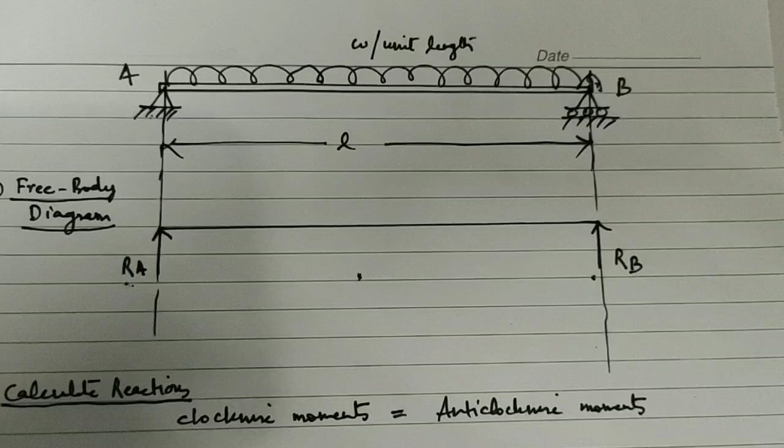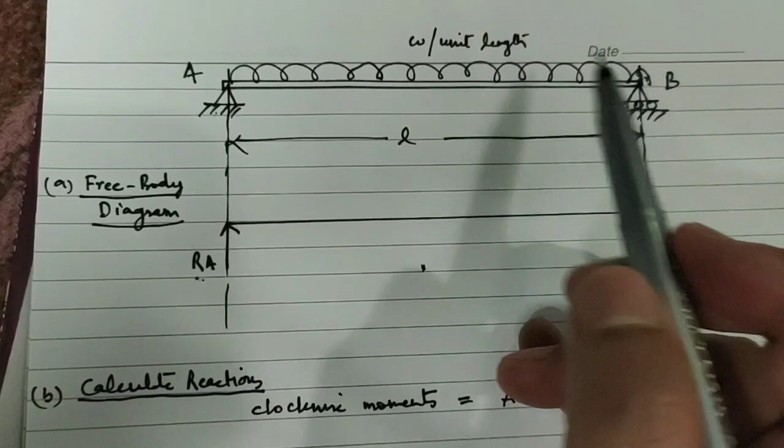Now we will find the shear force and bending moment diagram for a simply supported beam subject to a uniformly distributed load W per unit length. That is, this load is W per unit length.

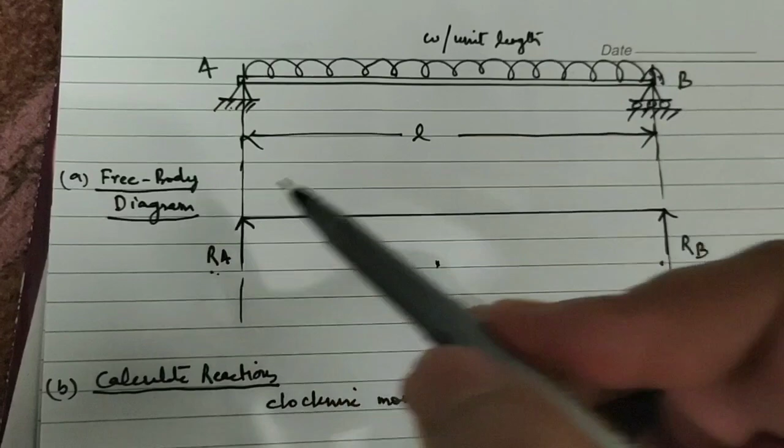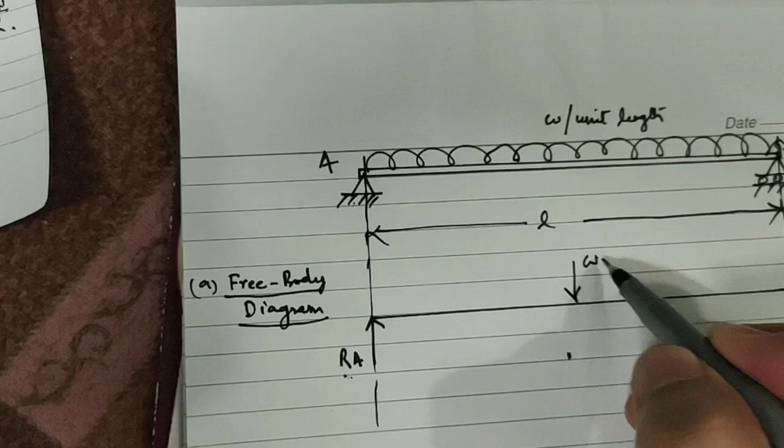First, let us draw the free body diagram. The hinge support is replaced by one reaction RA acting upward. The roller support is replaced by another reaction RB. The total load will be equal to W into L, and that will act at the center, at a distance of L by 2 from RA and L by 2 from RB.

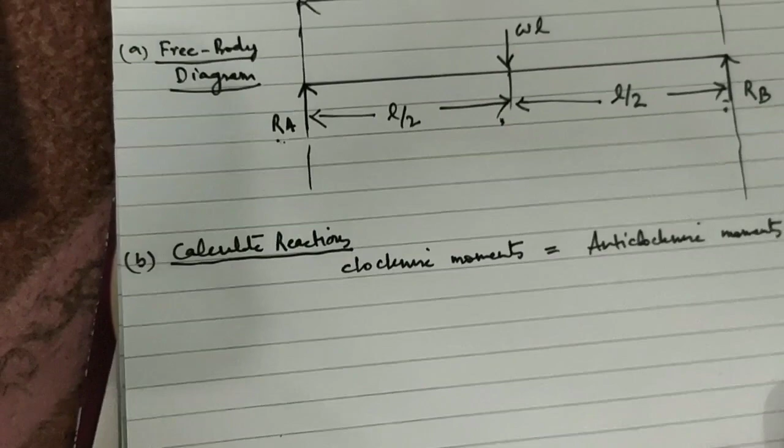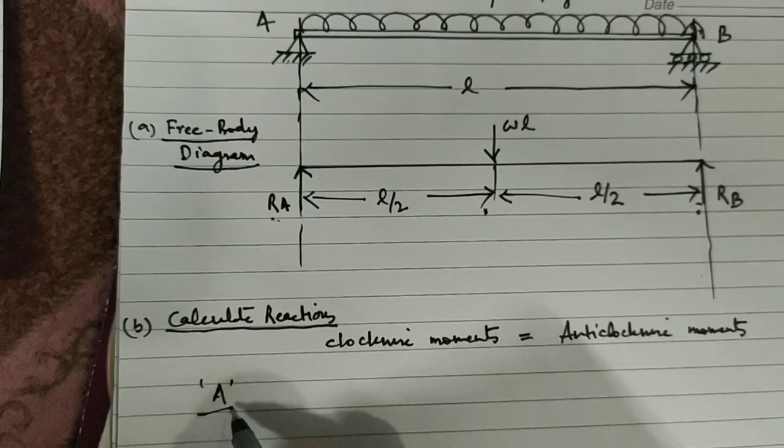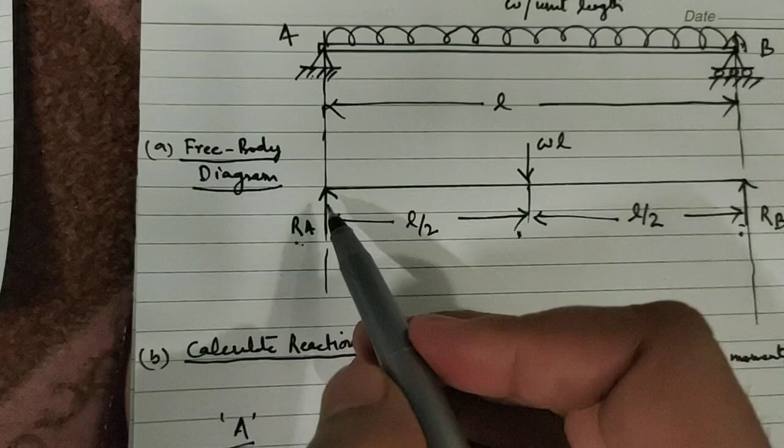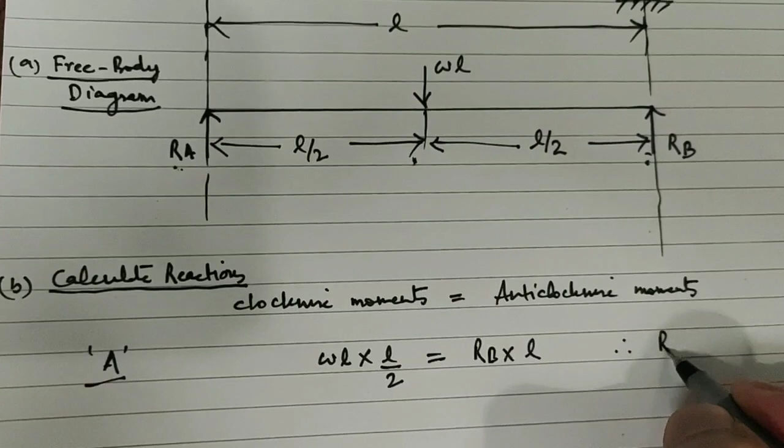Now we will calculate the reactions using the equilibrium conditions, that is clockwise moment equal to anti-clockwise moment, taking moments about point A. Clockwise moment will be WL into L by 2, and anti-clockwise moment about point A will be RB into L. So from here, RB comes out to be WL by 2.

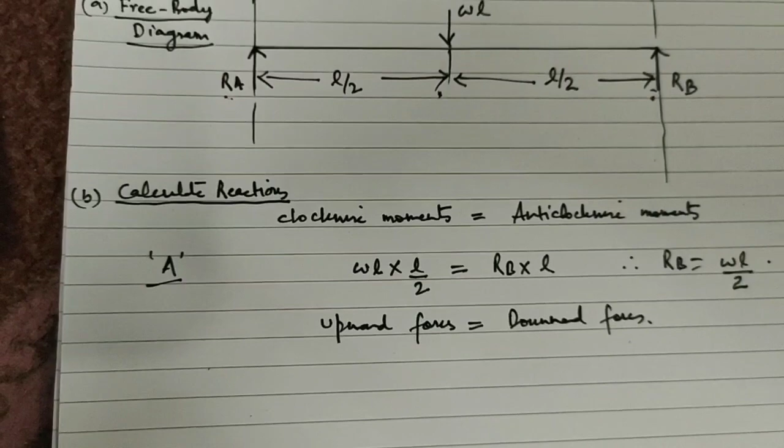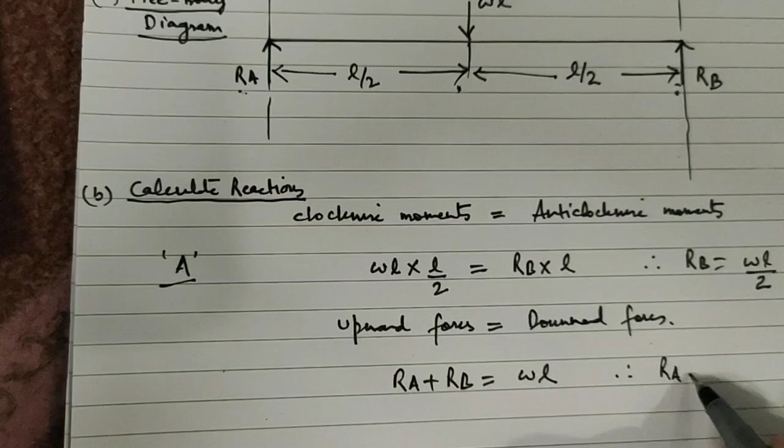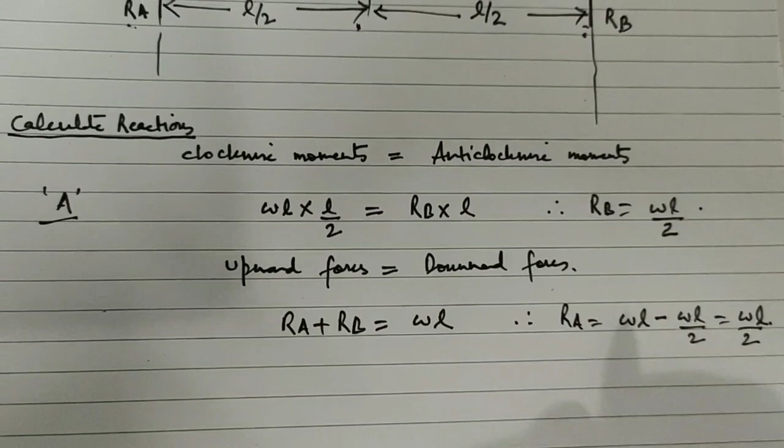The other equation is upward forces equal to downward forces. Upward forces are RA plus RB, equal to downward forces WL. Therefore RA will be equal to WL minus RB, that is WL by 2. So these are the two reactions at point A and B.

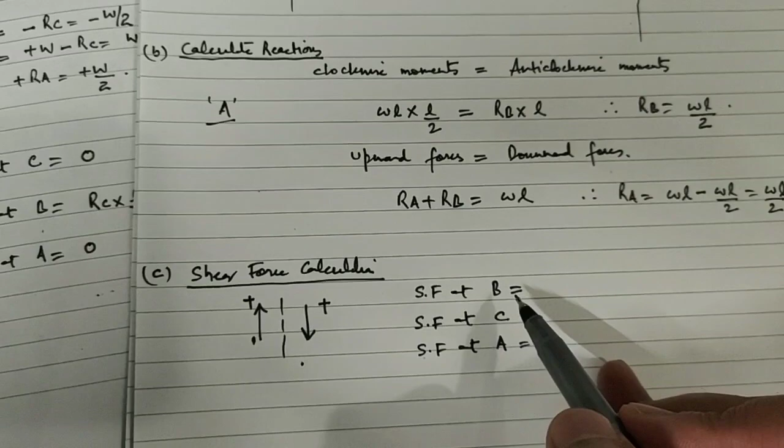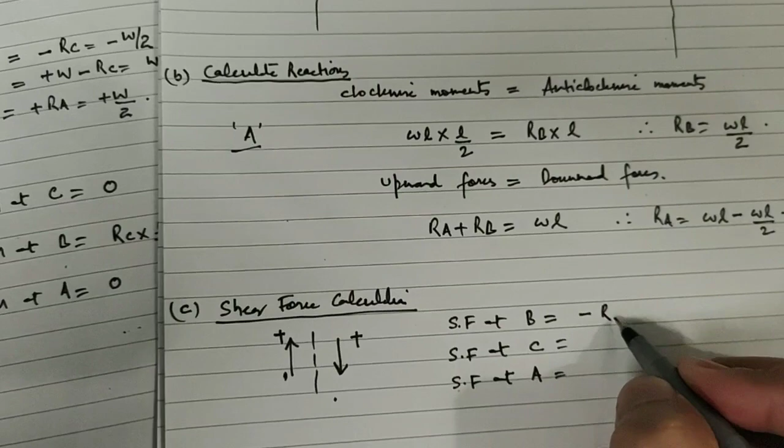Next we'll find the shear force at various points by considering the right hand side or left side of the beam, using these sign conventions. Now consider the right side of the beam. The shear force at point B will be upward RB, and upward force is taken as negative, so minus RB, that is minus WL by 2.

The shear force at point C, again considering the right hand side of the beam: downward force is positive, upward is negative. At point C there are two forces on the right side: RB acting upward, and only half of the UDL on the right side, which is W into L by 2. So the shear force at C will be half UDL, WL by 2, minus RB, which equals 0.

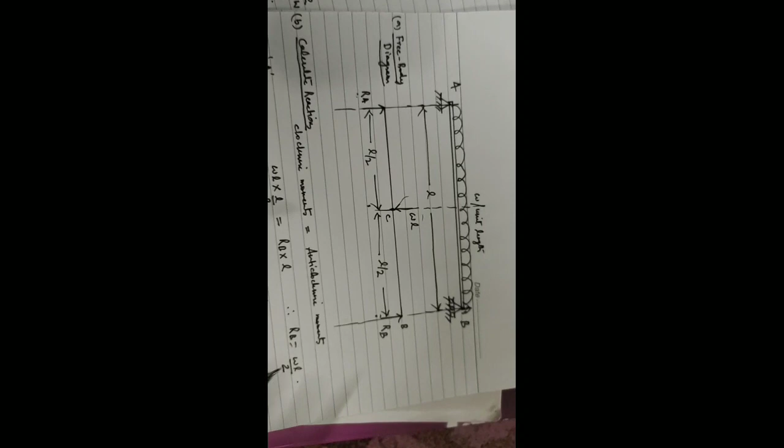Now for the shear force at point A, we consider the left hand side of the section, where upward force is positive. On the left side there is only one force, RA, upward. So the shear force at point A will be equal to WL by 2.

This diagram was only for calculating the reactions. In order to draw the shear force and bending moment diagram, we have to consider this other diagram.

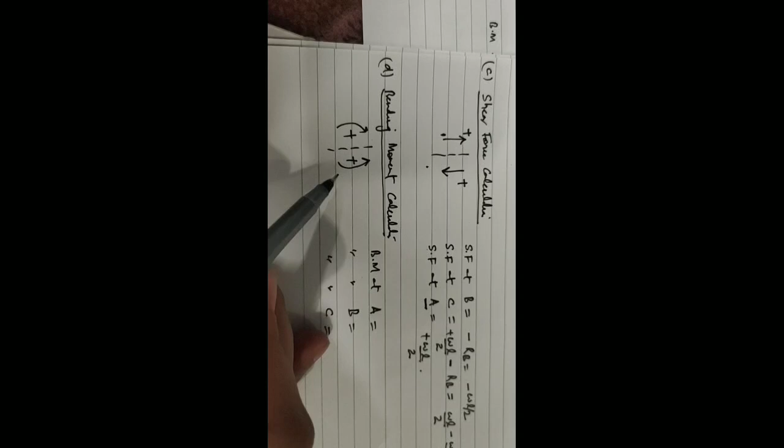Now we will calculate the bending moments using this sign convention: on the right side, anti-clockwise is positive, and on the left side, clockwise is positive.

Now, the bending moment about point A, considering the left hand side of the section: the moment of RA at A will be 0. Similarly, the bending moment at point B, considering the right hand side of the section: the moment of RB at B will be 0. So at the supports, the bending moment at A and B is always 0.

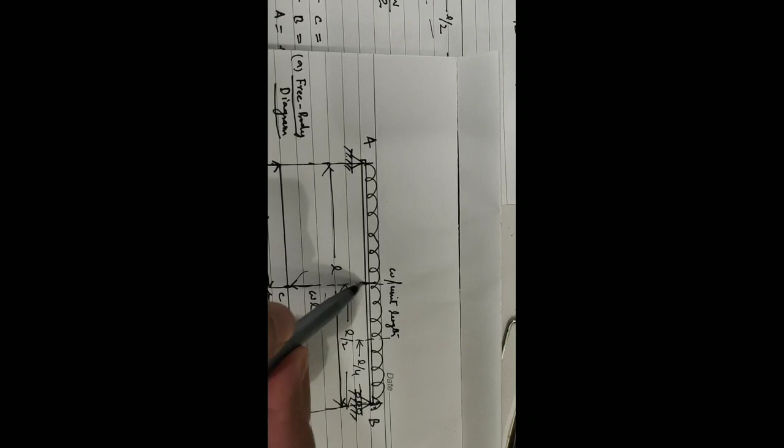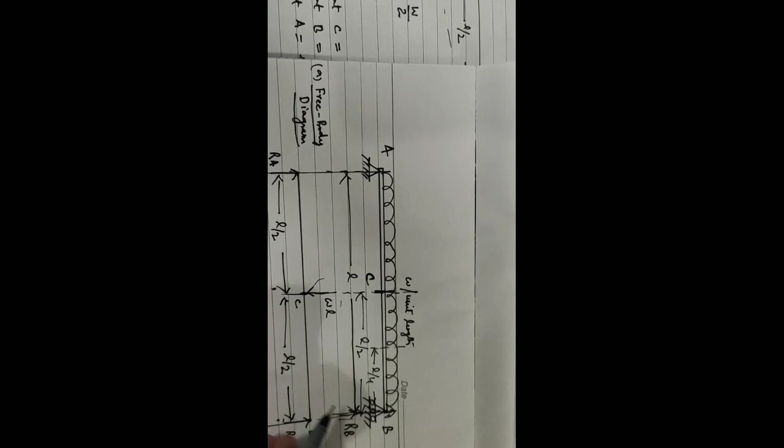Now we will find the bending moment about point C using this diagram. This is point C. The bending moment at C will be equal to reaction RB multiplied by L by 2, which acts in the anti-clockwise direction, and anti-clockwise moment is taken as positive. So this will be RB into L by 2, positive.

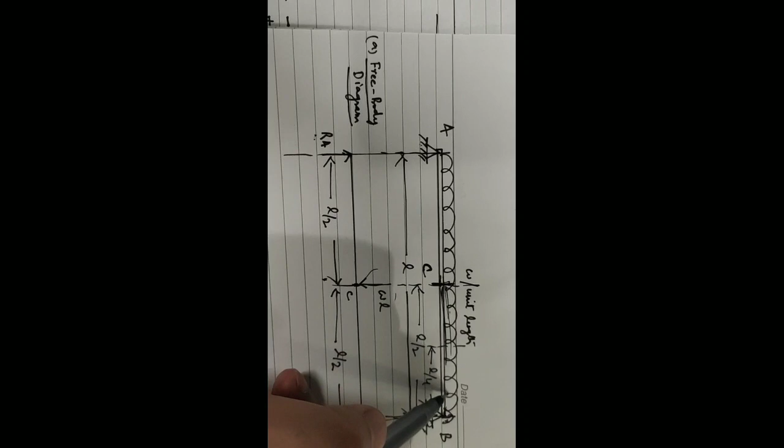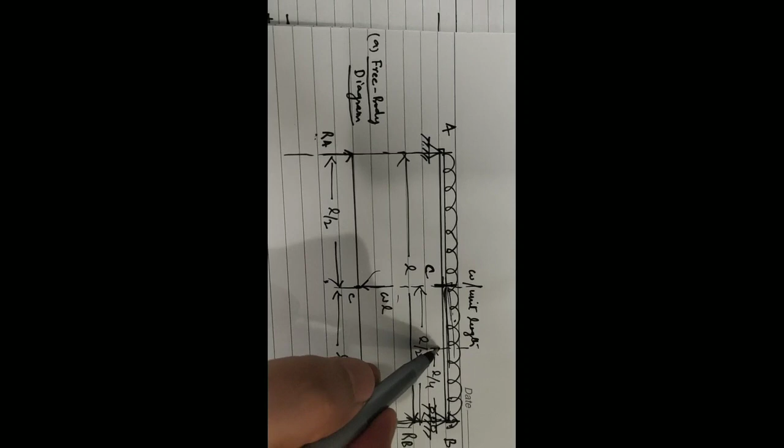At point C, there is also the half UDL. The half UDL force is W into L by 2, multiplied by the distance at which it acts. Since it acts at the center, the distance is L by 2 half, that is L by 4. So the moment is W into L by 2 into L by 4, and this force acts downward.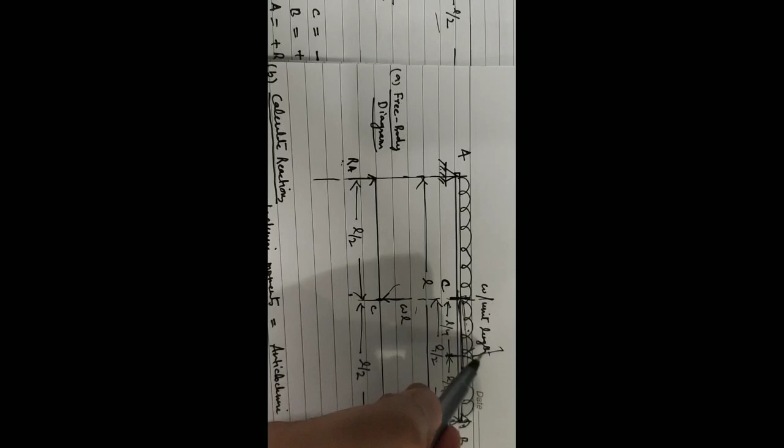So at point C, its moment is in the clockwise direction, therefore it is taken as negative. So this will be equal to RB, which is WL by 2, into L by 2, minus WL square by 8.

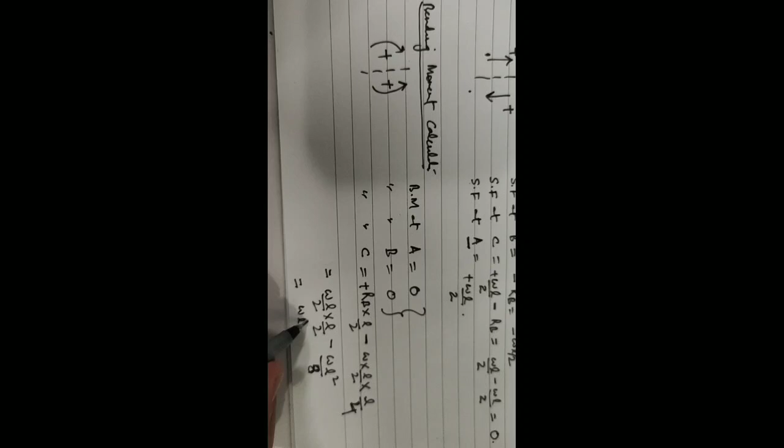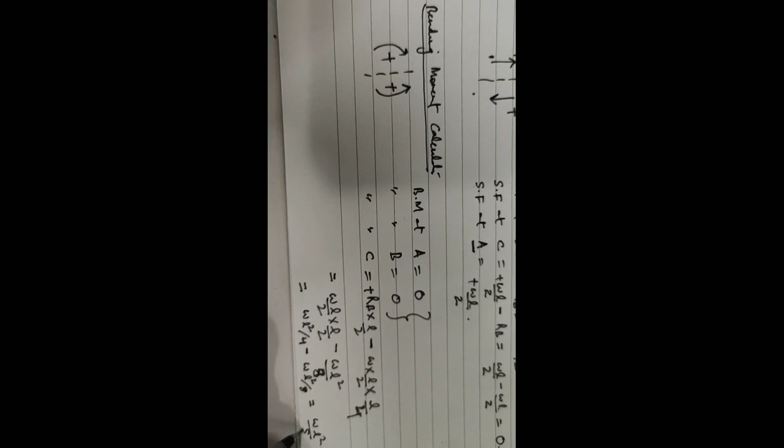So this will be equal to WL square by 4 minus WL square by 8, which comes out to be WL square by 8, positive. So this is the bending moment at the center.

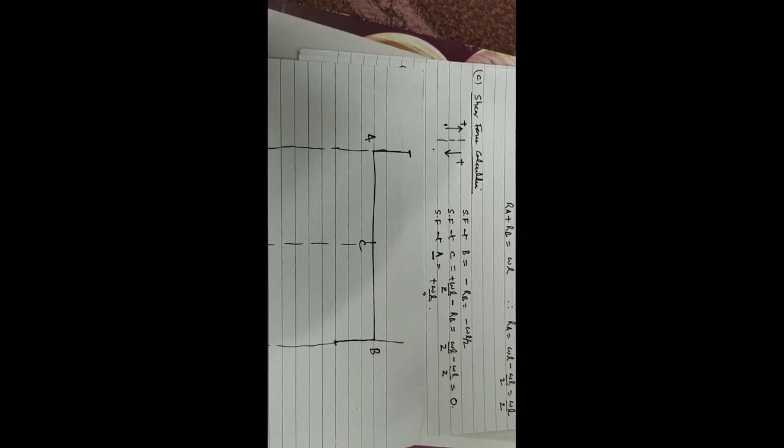Now we will draw the shear force and bending moment diagram. The shear force at point B is minus WL by 2, downward. At point C it is 0. At point A it is plus WL by 2.

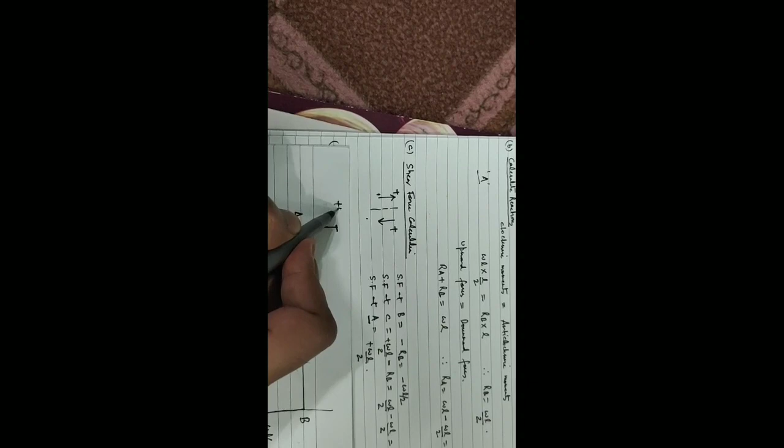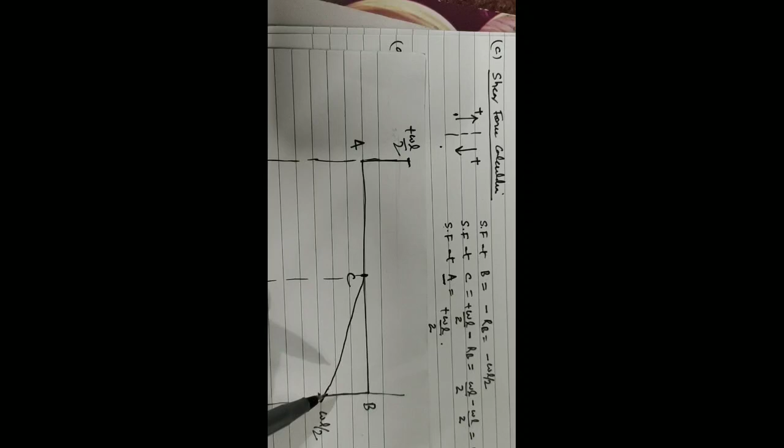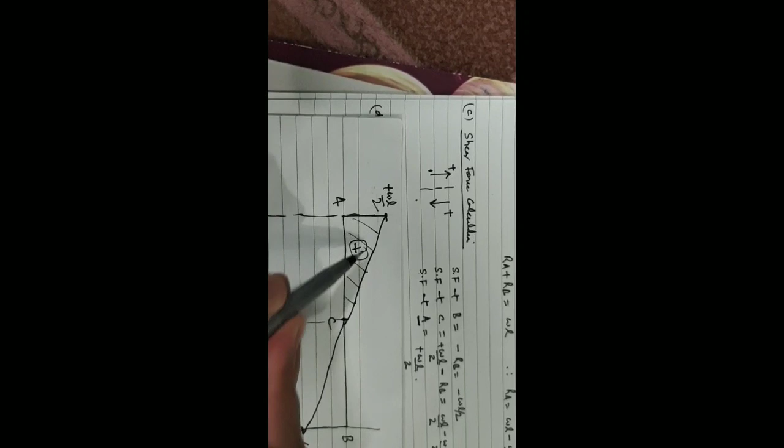Now from B to C there is a UDL, so this will be an inclined line, and again from A to C it will be a UDL. So this part will be positive, and this part will be negative. For the bending moment diagram, at point A the bending moment is 0, at point B it is again 0.

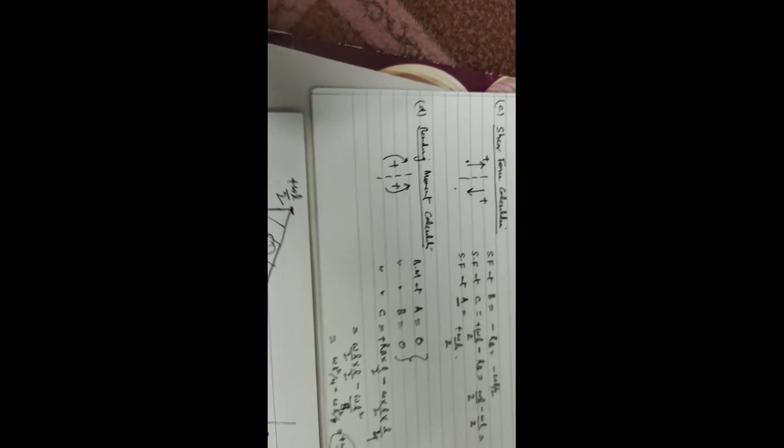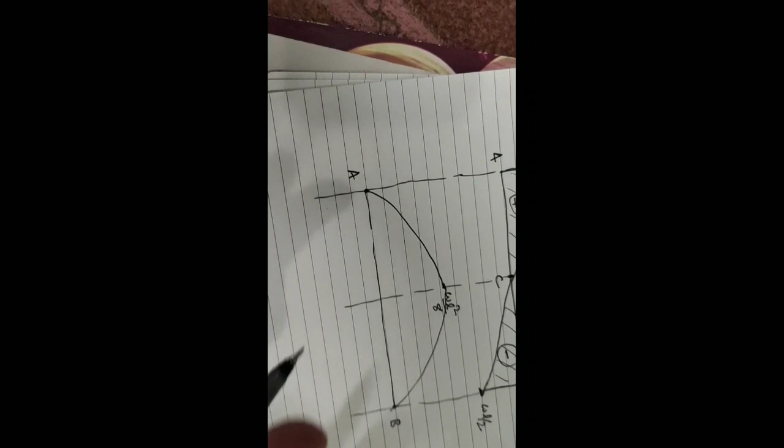And at the center, the bending moment was WL square by 8. So at the center it is WL square by 8. Since the shear force line is inclined, the bending moment diagram will be parabolic, like this. So this is the positive bending moment diagram, and since there is sagging of the beam, the bending moment diagram is positive.